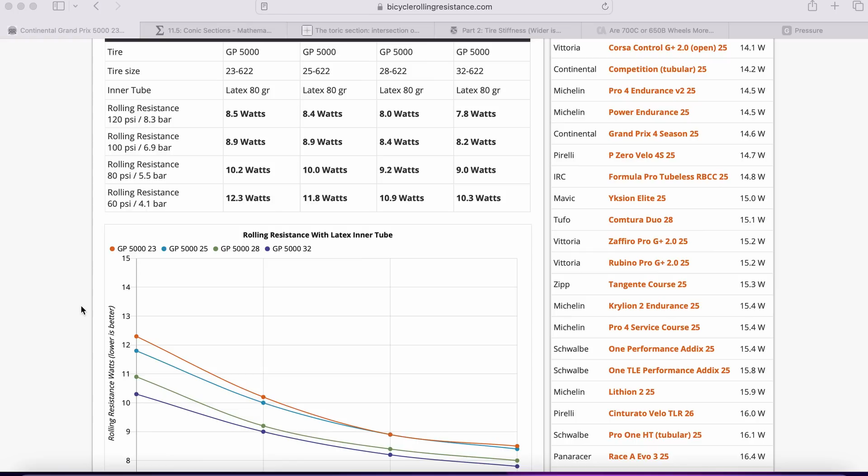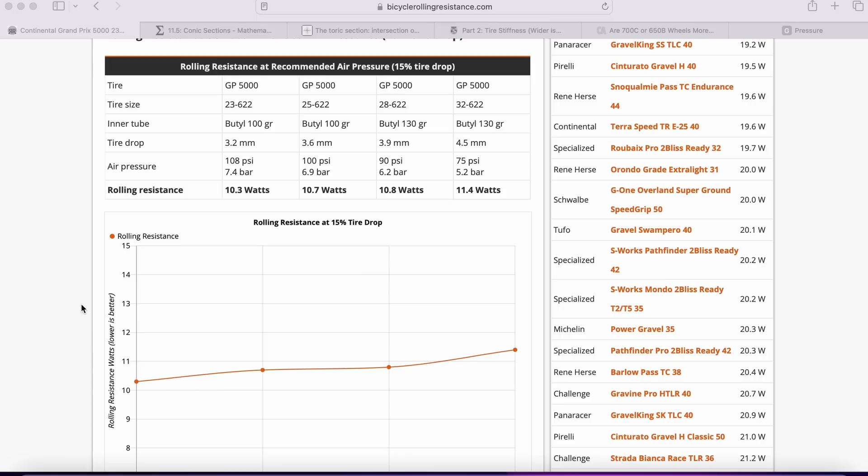And showed that wider tires, in fact, have lower rolling resistance on the rolling drum. The author of this test, however, pointed out that wider tires at the same air pressure as narrow tires would be less comfortable. This is because wider tires have more air volume, and more air volume makes the tire feel firmer. So the author then repeated the test by establishing a comfort level that all the tires would be equal. To do this, they lowered the pressure in the wider tire so that the vertical displacement would match that of the narrower tire. And when they repeated this test, lo and behold, the wider tire had higher rolling resistance than the narrow tire.

Another test was carried out by fellow cycling YouTuber Cycling About. He has a website where he publishes technical articles on things that he's interested in. One article he published looked at the difference between a wide gravel tire and a narrower gravel tire. The wide tire was 50 millimeters wide and the narrow tire was 40 millimeters wide. In that test, they rode these different tires on a bumpy gravel track, as they said, and compared the vertical compliance, or comfort, to each other by using an accelerometer.

Now, in order to set the tire pressure in the different tires, they used LaPlace's Law. We're going to talk about what LaPlace's Law is, and I'll give you a demonstration. But for now, just know that LaPlace's Law is this idea of setting equal casing tension based on the diameter of the tire. So they used LaPlace's Law to set the tire pressure in this study, and it turns out that the wider tire was in fact more comfortable.

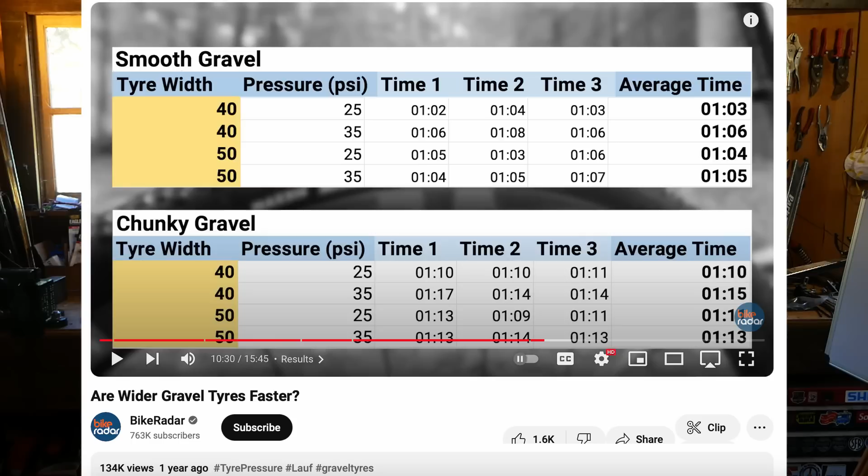Dylan Johnson, who many of you know, fellow YouTuber, currently 17th place in the Lifetime Grand Prix, left a public comment on a BikeRadar video titled 'Are Wider Gravel Tyres Faster?' He makes an argument that the conclusion of the test results in that video would have been clearer if the authors had compared the two tires at equal casing tension.

So this got me thinking: does equal casing tension equal comfort? If both tires, a wide versus a narrow, were set at a pressure so that the casing tensions are equal, does this actually equate to equal comfort? So I looked around on the internet to see if I could find any studies done on this with bicycle tires, and I couldn't come up with any. So I thought to myself, well, maybe what we should do is set up an experiment and test this for ourselves.

Today, what we're going to do is see if we can figure out whether wide tires at a lower pressure with equal casing tension to a narrow tire at high pressure will have equal comfort. So what is LaPlace's law?

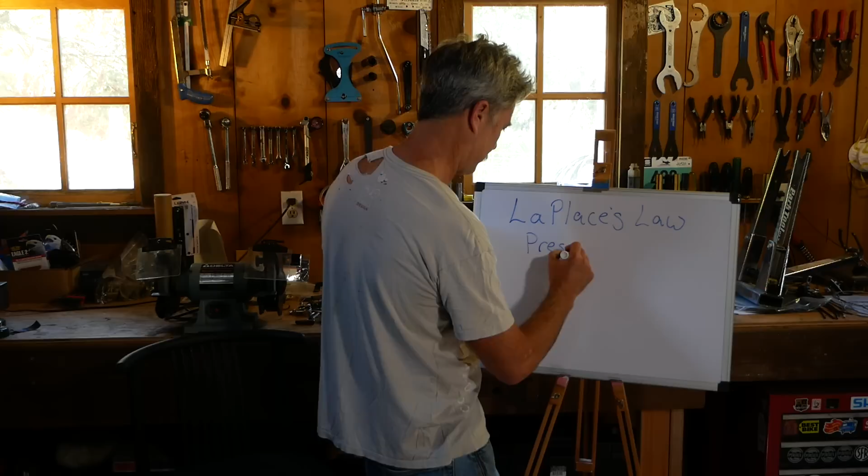I'll put up a little diagram on the screen so we can all see what he was saying. Laplace was a famous French mathematician and scientist. He came on the scene about 100 years after Newton, and he studied Newtonian physics and was really interested in it. He was more noted for his Laplace transform, but also for the Laplace law dealing with pressure vessels.

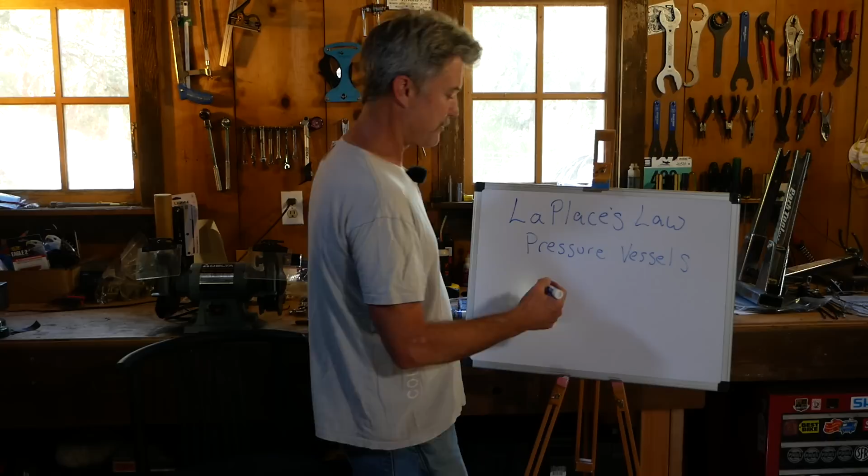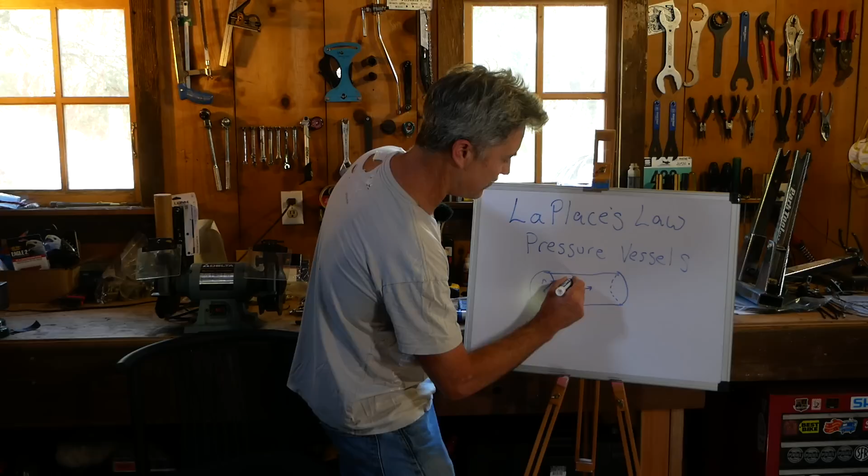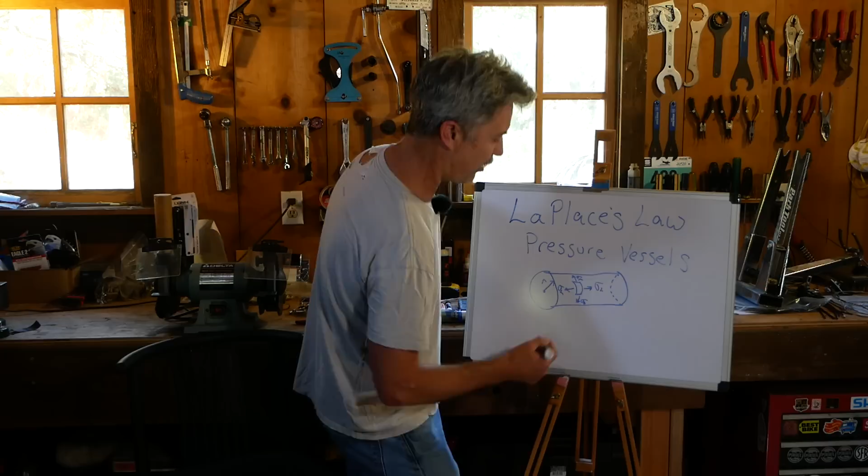To give you a simple explanation, what Laplace said was that the internal pressure of a pressure vessel - let's say it's a tank like this with a radius - if the pressure in the vessel is in equilibrium, the tension or stresses, the principal stresses in the vessel, that is the stresses in the longitudinal direction and then the stresses in the radial direction, we'll call that R.

The radial direction, or the hoop stress direction as it's sometimes called, would be proportional to the size of the pressure vessel. So naturally, a lot of people in the bike world assume this should also apply to our bicycle tires, because our bicycle tires are thin-walled pressure vessels.

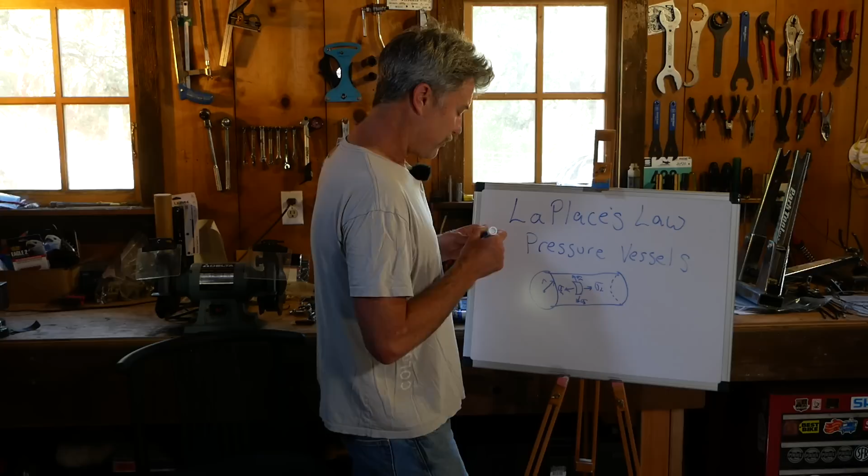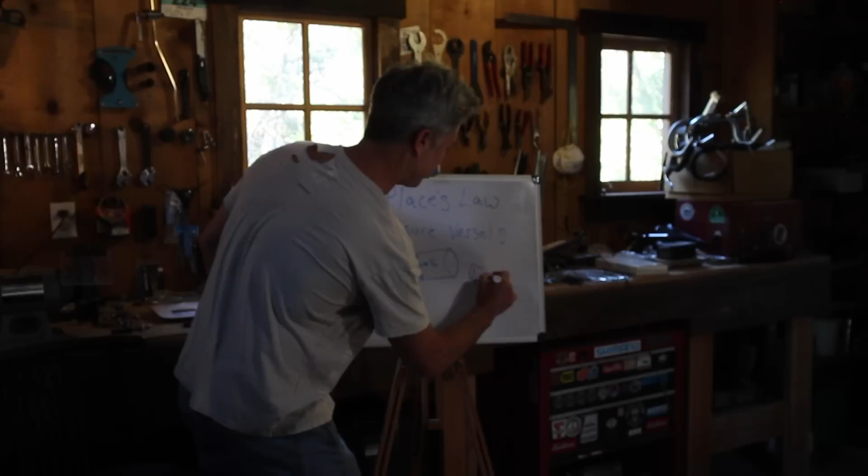So the formula that comes out of this, if you do the math and a free body diagram, is that the stress in the radial direction is proportional to the width times the pressure divided by 2. It's essentially a very simple relationship.

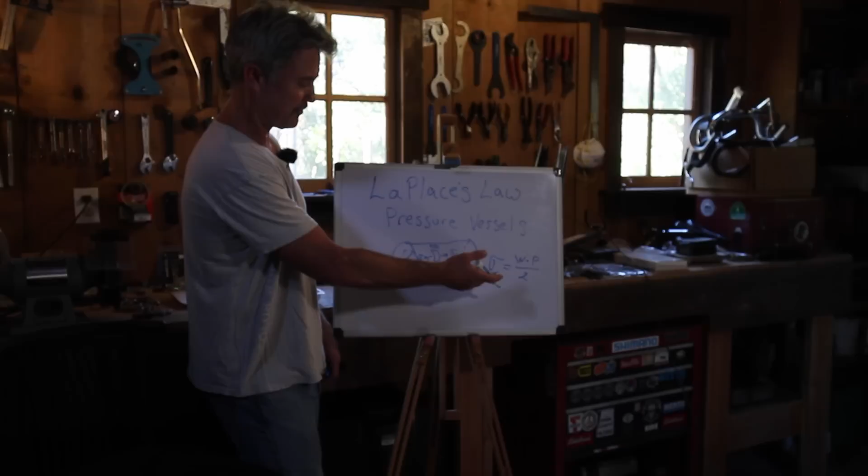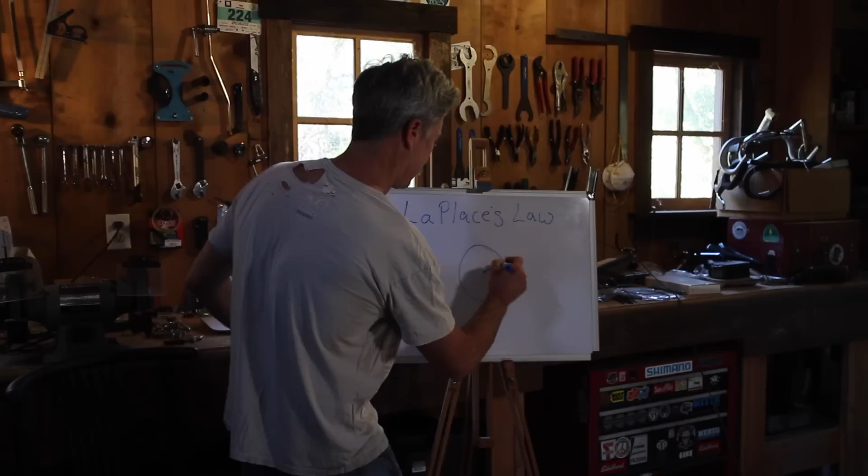If you take this idea and apply it to a bicycle tire, you would need to take 2 tires. Let's just show it - let's clear this out a little bit. So if we had 2 bicycle tires, here's a small tire and a large tire. We'll use a big R for the big tire, and a small r for the small one. And we have a width of our tire, so width 1...

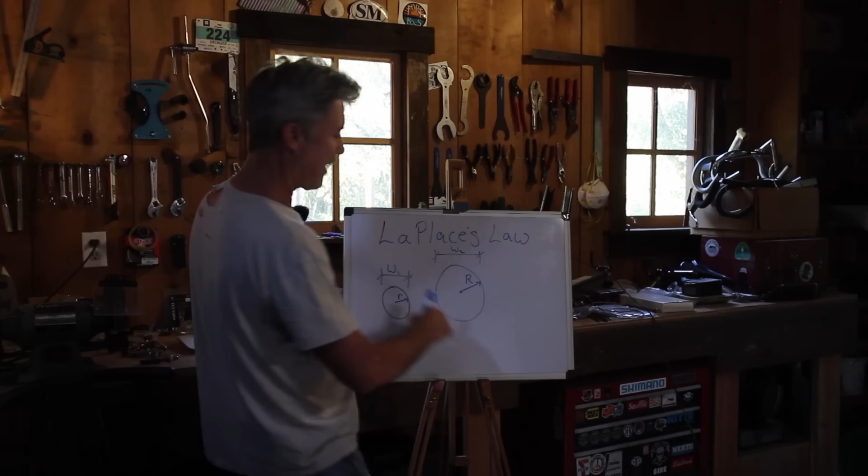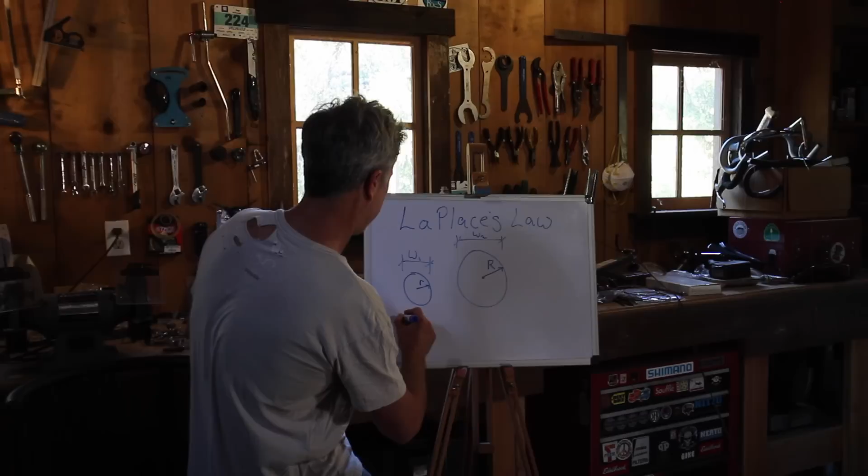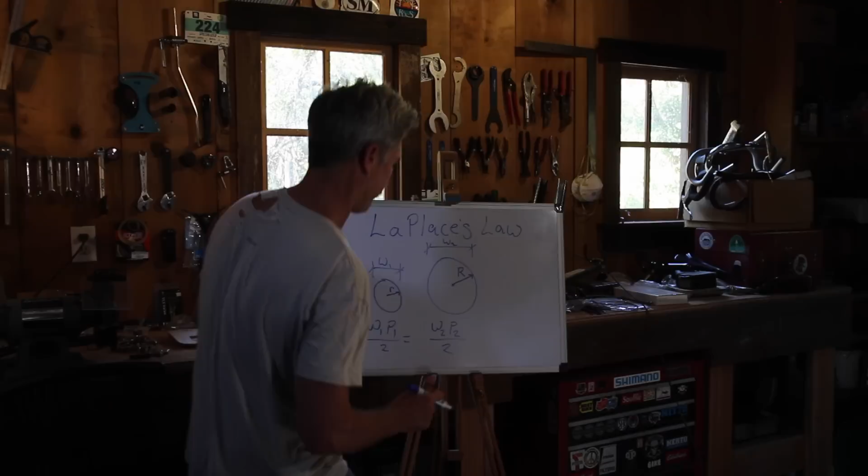...and a width 2. In order to have an equal tension in both of these tires, we would have to vary the pressure. According to LaPlace's law, we would set the stresses equal, and we end up with W1 P1 over 2 equals W2 P2 over 2. We can rearrange this equation very easily - the 2's cancel, and what we end up with is P1 equals P2 times W2 over W1.

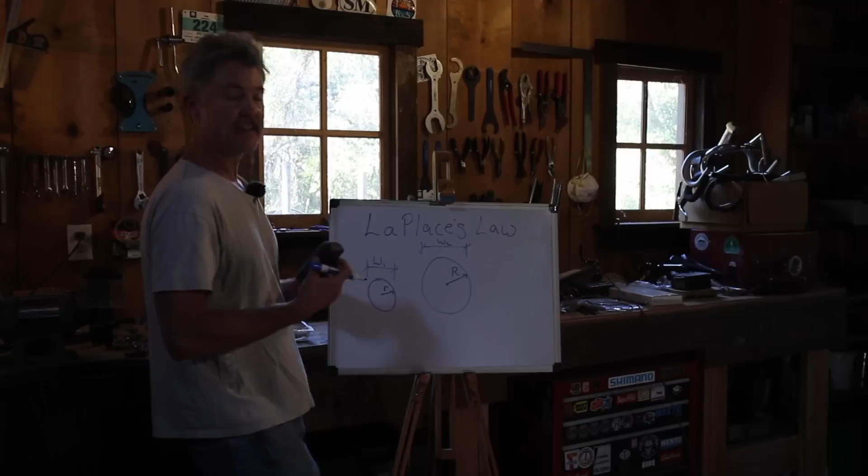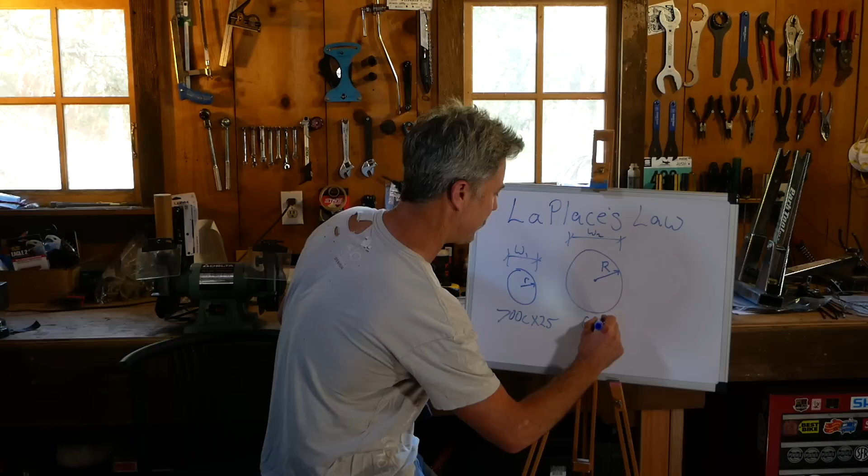So it's a very simple ratio here - we can solve for pressure 1 based on the pressure we put in. Let's do a quick example, and I'm going to pick a tire size. That's the tire size we'll be using in this test, which is a 700C by 25 and a 650B by 48. We're going to run through a series of different pressures and different loads - I'll show you the test setup in a minute.

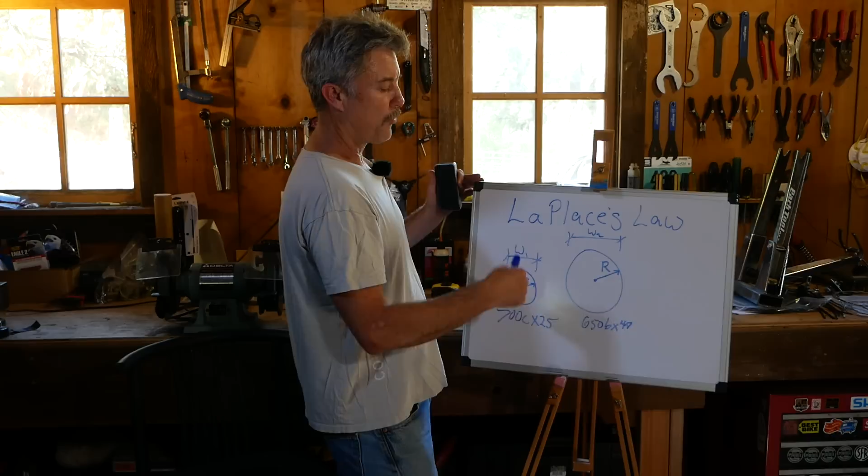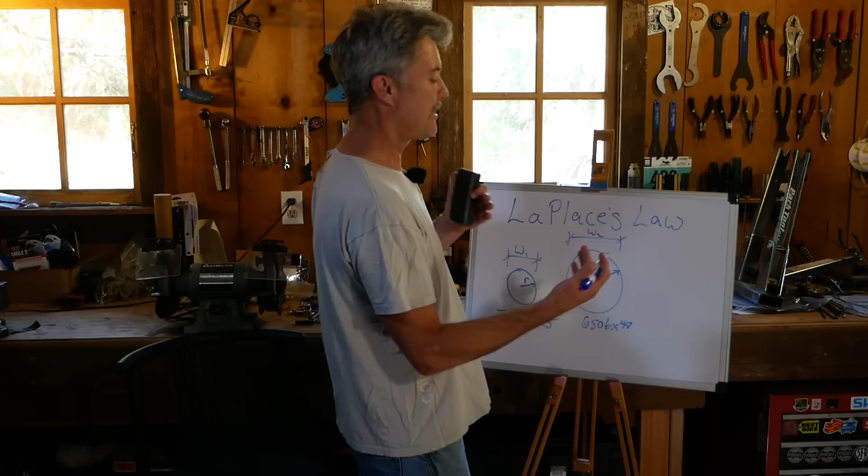We will see if Laplace determines the same load displacement in each of these tires. Will they match? Will the comfort be equal? The comfort in this case is the vertical displacement of the tire. The theory is that we'll set these to equal casing tension, and therefore the curves will be the same.

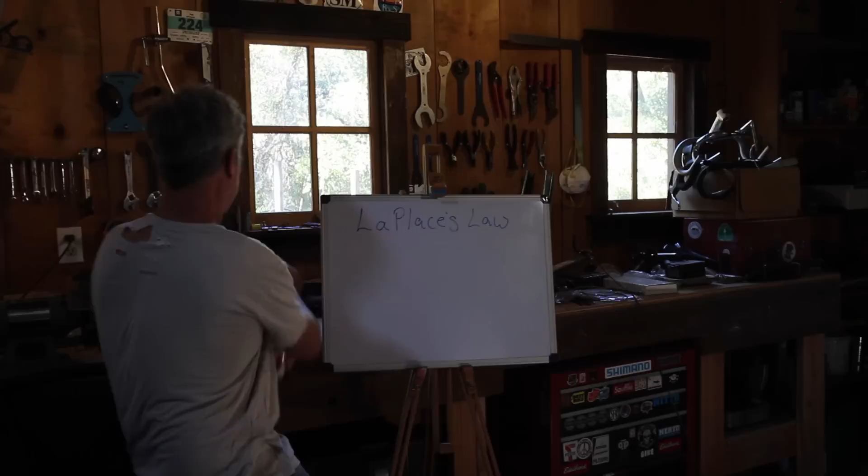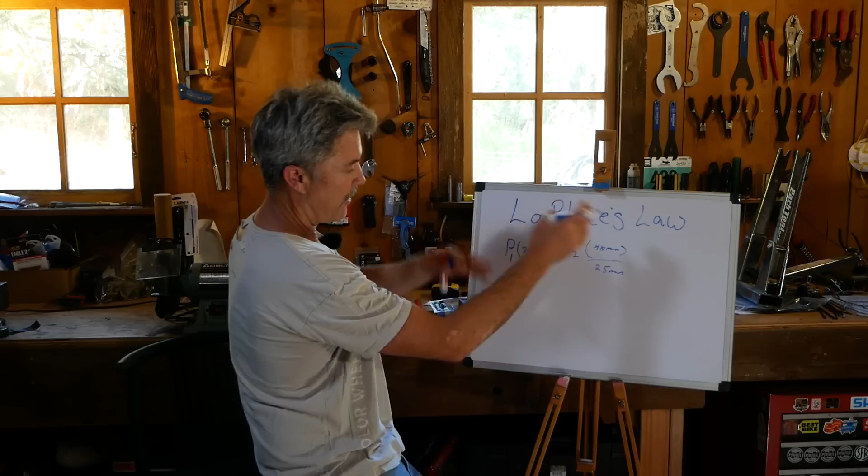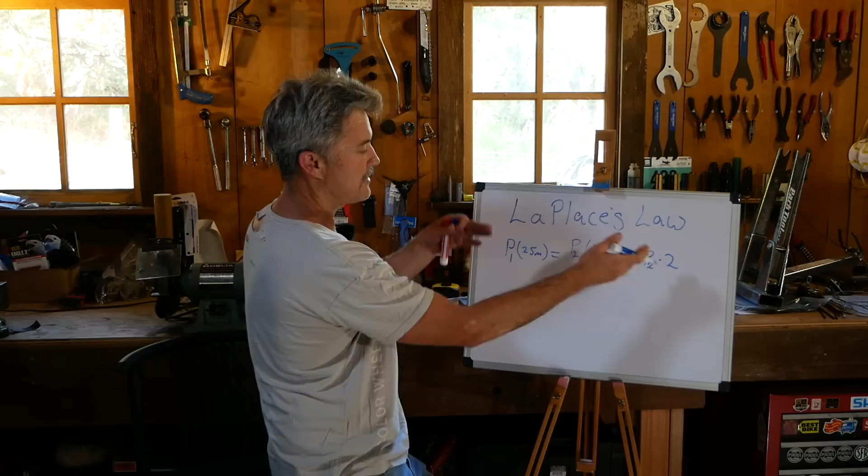So here's what Laplace would predict for these tires. If our width was 25 millimeters, the pressure in the 25 millimeter tire will need to equal pressure 2 times 48 millimeters divided by 25 millimeters - that's the pressure we'd set in 1 based on pressure 2. If we just assume for now, since I don't have a calculator, we go to 50 millimeters, then this is simply P2 times 2. So the pressure in 1, the smaller tire, needs to be twice the pressure in 2.

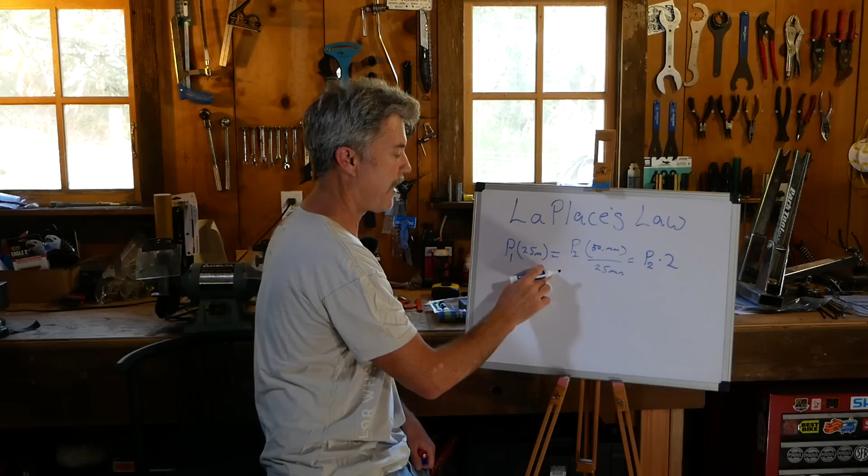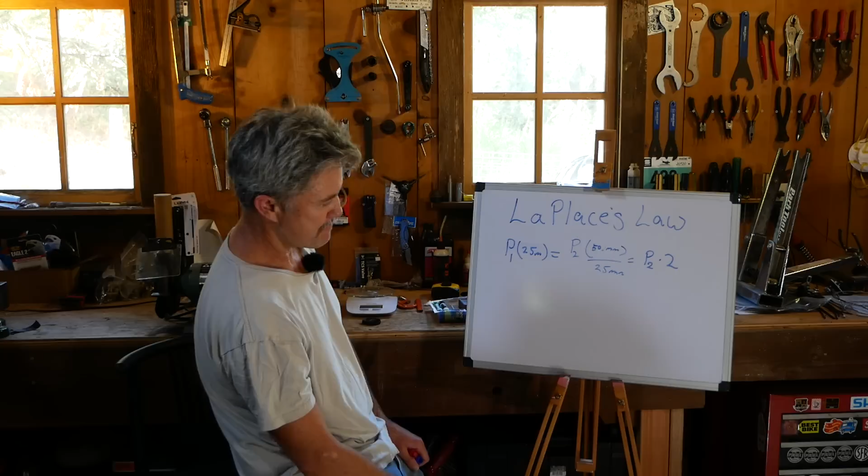I want you to keep note of that as we do this experiment and look at the data - that LaPlace's law says the tension in the sidewalls are equal when the pressure in 1 is equal to 2 times the pressure in 2. Okay, and that makes sense - the skinnier tire will be pumped up higher than the wider tire.

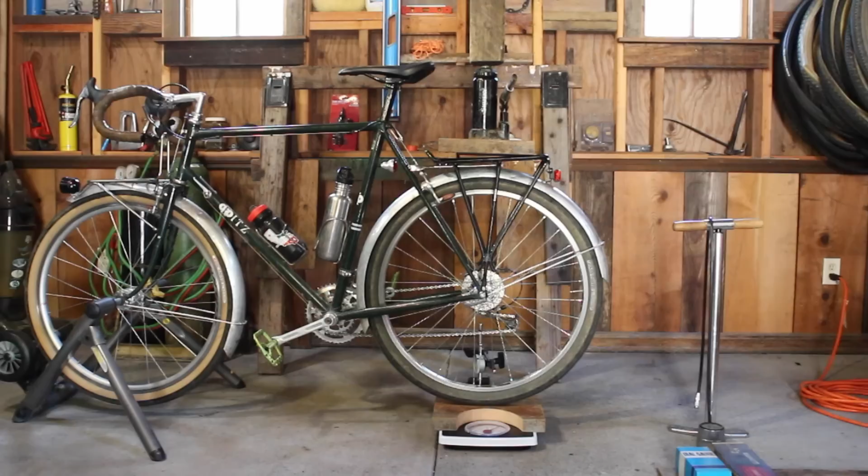So what I have is a very simple setup, something pretty much anyone can do at home if they're interested. I have my bicycle in a bicycle trainer stand with the front wheel mounted in the trainer, and the rear wheel is what is being set up in our test so that we can measure the displacement. I picked the rear wheel because it was easy to mount that rack on the back of the bike that I could then use as the way to put a hydraulic press on it and push the rear tire down into our load cell.

On top of our load cell, we have our dial indicator, which is what we're using to measure the displacement. I chose to mount it this way because I wanted to take out any possible error that might have occurred if we were measuring it where a lot of tests are done, measuring displacement at the axle relative to the ground. By setting it up that way, you introduce a lot of error in your displacement because when you load a bicycle wheel, the spokes that are in tension relax a bit, so some of the displacement is the spokes themselves plus the distortion of the rim as you have unbalanced tension now in your spokes.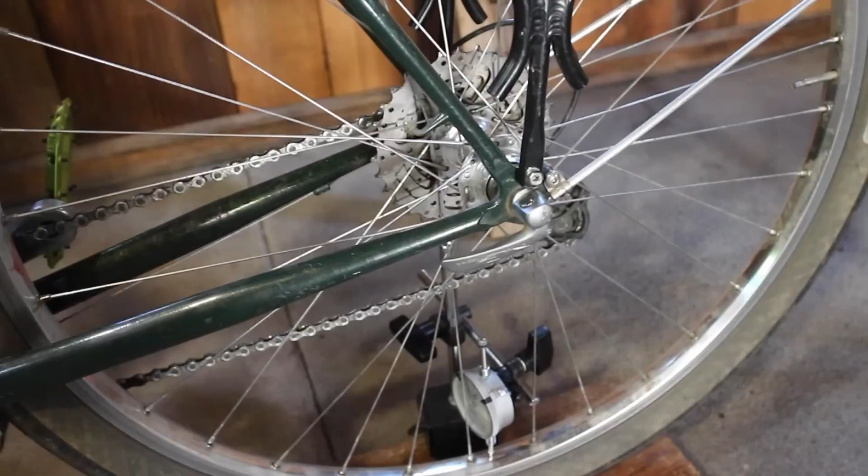The rim itself will also deflect slightly, and the load cell can also deflect a little bit as well. So by putting the measurement from your axle to a point on the ground somewhere, measuring that way will introduce error. I think this method reduces the amount of displacement error as much as possible.

We have our dial indicator set up directly over our contact patch, and we have the contact patch sitting on this 2x10 wood block with a circle cut out of it so that we can read our load cell. That's there because this platform on the bathroom scale is made out of very thin metal. While it worked great with my magnetic base, the problem was the tire puts a concentrated load in the middle of our bathroom scale, and it actually causes the bathroom scale surface to bend, which threw off the measurements a little bit. By putting this 2x10 on here, we're able to distribute the stresses more evenly on the load cell and take out that distortion that was happening.

So the forces for our load test are being generated by this bottle jack. This is a 4-ton bottle jack, and it is pushing up on this 4x4 post, which is mounted to the ceiling. I mounted it with these metal angle clips that keep the post hanging from the ceiling rather than sitting on, weighing down the jack and the bicycle and adding weight to our test.

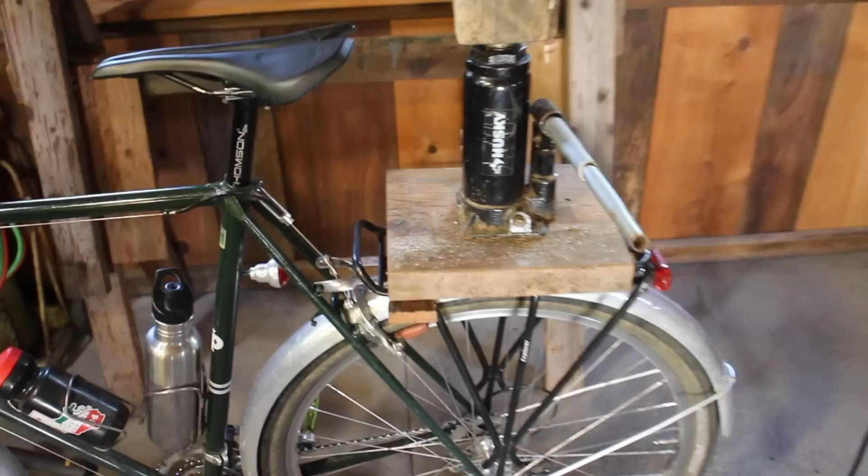So the post is not actually included in the weight that you see here. There's 36 pounds right now, and that's the bicycle, the bottle jack, the 2x10 on the scale, the dial indicator and magnetic base, and this other 2x10 up here, which is just to help level out the bottle jack so that all of the load is collinear with the rear axle and contact patch. I wanted the load to be as straight as possible to reduce any eccentricities or any anomalies that might have occurred, any out of plane loading that might have occurred when we test it.

The front of the bike is supported by this bicycle trainer stand, and everything is very solid here. Nothing is moving around when we're loading it.

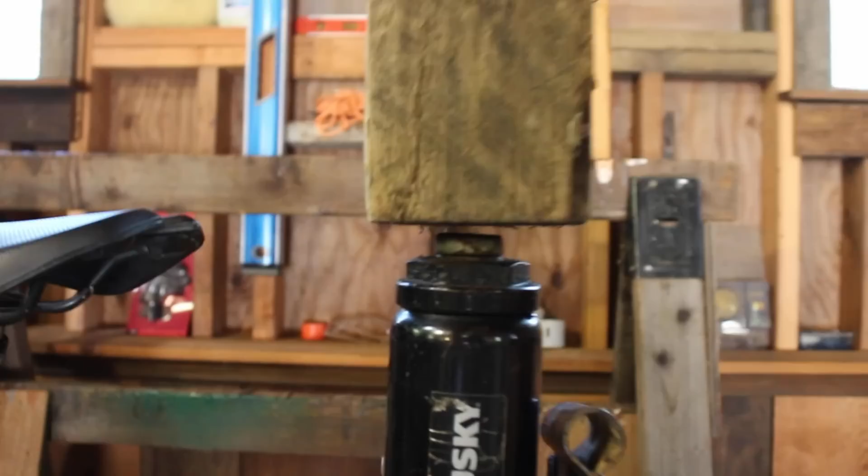As you can see, if I go ahead and run through a little example here. This is just to lock in the jack. You can see there's no contact right now between the 4x4 and the bottle jack, so it's free to move around. So let me go ahead and get this thing started here for a second. We'll go ahead and push that, and as you can see down here, as I pump this, we can carefully apply load to the tire.

And while that is going, you can see that the dial on the dial indicator is also moving as we apply the load. Now this dial indicator here is a 1-inch dial indicator that I've had for a really long time actually. I bought this when I was in high school at Harbor Freight. So this is a 1-inch dial indicator with a graduation, and each one of those points on there is 1/1000th of an inch.

And over here, we're accurate to about a pound.

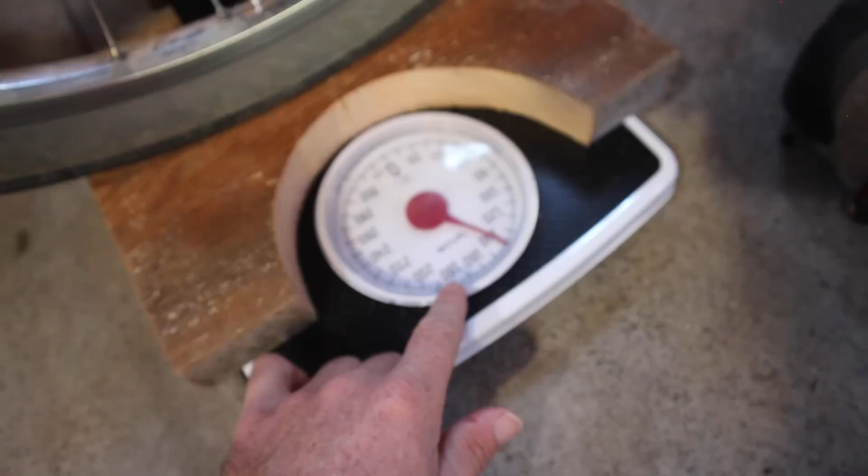Each one of these points on here, each one of these graduations is 1 pound, and we go all the way up to 320 or 330 pounds. But for our test, we're gonna stop at 300 on our scale.

I'll be running 2 different size tires using 650B wheels. So we're gonna be using this wheel here when we do our 700C because it's got a very similar style of rim, not exactly the same width, but fairly close. And I will measure rim width as well as tire width, and I'll report all of that in this experiment.

So this is the dial calipers that I'll be using. These are very accurate down to also 1/1000th of an inch.

For air pressure, I will be using this floor pump. I actually have 2 floor pumps. I checked the 2 floor pump gauges to each other and they were off by about 8 pounds per square inch, so they're very different. But anyway, we're gonna use this pump for all of our tests and all of our pressures.

I do not have one of those special digital tire pressure gauges. I have an old school one that's the sliding gauge, but it has a Schrader valve type valve on it and it won't work with the Presta. I do have a Presta valve adapter, but for the sake of simplicity, this is the gauge I'm using for my tire pressure. Like all tire pressure gauges, they are not very accurate, but this is consistent as long as we use the same tire pump with tire gauge for all the tests. At least the test data is consistent.

Okay, so let's take a look at the data that we collected from this experiment and see if we can figure out what's going on here.

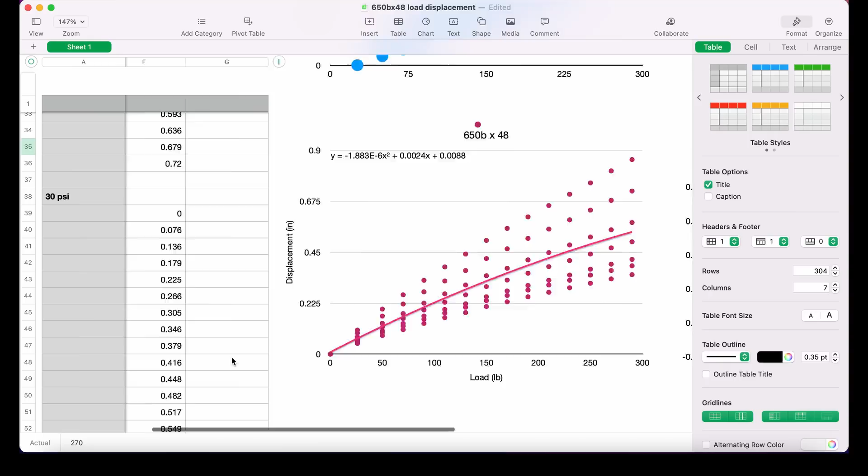So these are the graphs from this data. All this data for all these tests were plotted together on the same charts, the same graphs. And I did that so that we could see how each data set compared to the previous data set.

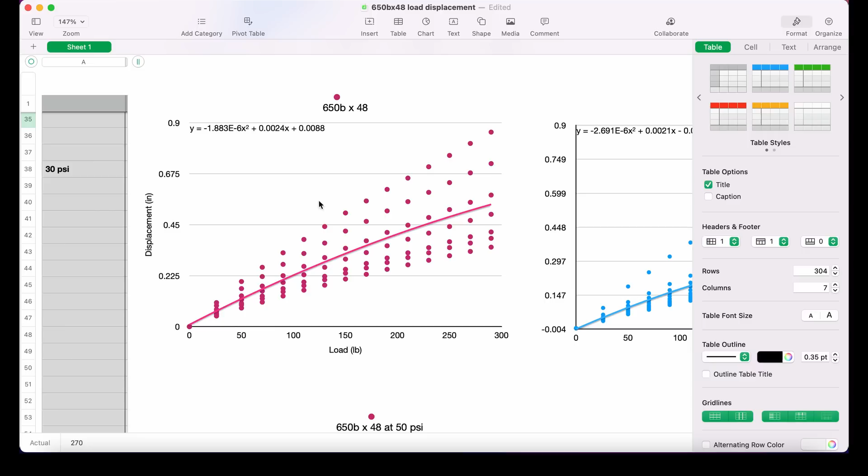So this particular chart is the 650B by 48, and this one next to it is the 700 by 25. These are all the data points for both tests, for both tires. Now you'll see this data set here stops at about 220 pounds, and that's because the 25 millimeter tire bottomed out at 220 pounds at the 20 psi.

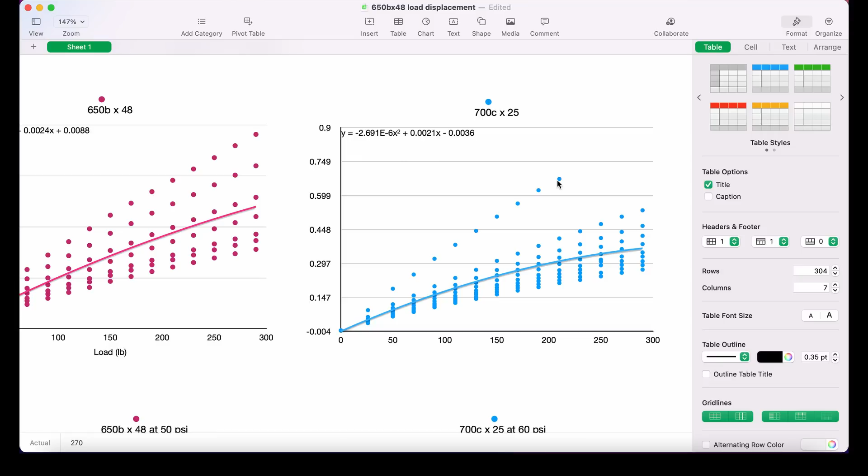So we stopped the test early. Over here for the 650B, we started at 10 psi and we were able to complete the test up to 300 pounds, but you can see it's quite a lot of displacement.

Now these lines that are on here, these are an approximate curve fit for the data set, and it's utilizing a polynomial second order equation to predict or to show the trend of the data. So what's nice about this data set is that I have them colored: red is 650B by 48 and blue is 700 by 25.

And what we can do is we can overlay these charts and take a look at the differences in the data and how the two tires will, in a sense, compare to each other. We can clearly see that the 25 millimeter tire has a lot less deflection.

Deflection is plotted on the y-axis and load on the x-axis for both data sets. Both axes are scaled to match each other, so when we overlay them like this, we can see how the two tires compare. I want you to notice a couple of things from this data.

First, as the load increases, the displacement is increasing at a decreasing rate, so it's a non-linear curve. This is one data set here: 10 psi, 20 psi, 30 psi, 40, 50, 60, and 70.

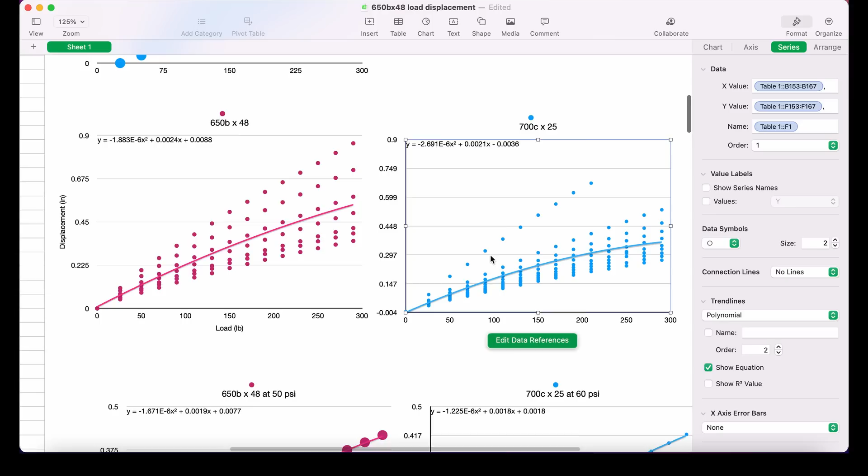Now we want to see if LaPlace would predict a similar load displacement for these tires. So I dug through the data, overlaid these data points, zoomed in, and tried to find the best-fitting data where the two curves matched each other as closely as possible. I could see that this data set, blue and red, overlay really well.

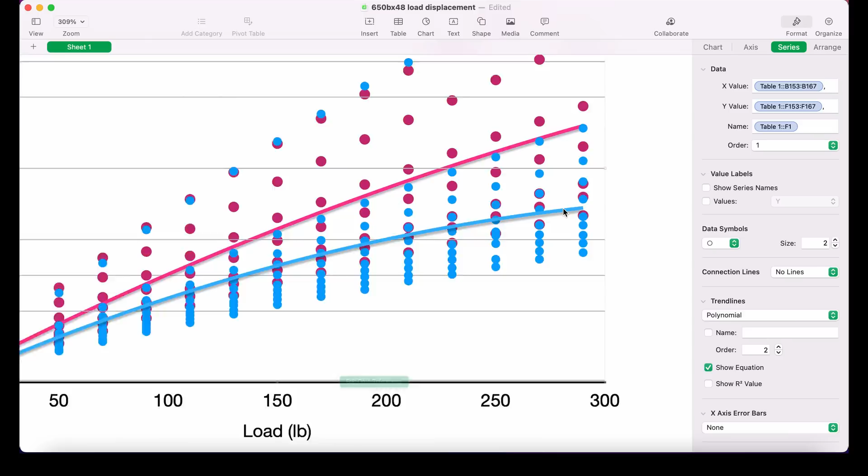This one's pretty close, that one's pretty close also. So down in these areas we're starting to see some similarities. I pulled out a couple of data points where the two charts were overlaying very similarly - the two tires at these pressures.

So here's two data points, and you can see that these two curves match each other pretty well. I have the charts scaled vertically to be similar or matching, and we can see that blue and red are following nearly the same trend.

So what is this air pressure? This is the 25 millimeter tire at 60 psi, and this is the 48 millimeter tire at 50 psi. Now, if we were to use the LaPlace pressures - 60 psi and 30 psi, which is what LaPlace would predict using the LaPlace relationship - you can see the two curves are not the same.

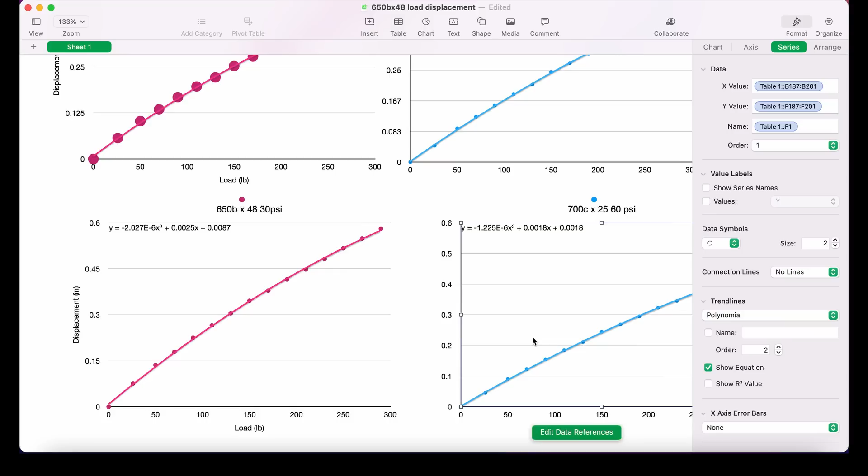The 25 has much less deflection at every load, so it's not going to deflect as much. Essentially, using LaPlace's law, or setting the casing tension equal, will penalize the narrow tire while giving some slack to the wider tire.

Now I chose 30 psi because that's a more realistic number for a 650B/48 tire. Most people are not going to run 50 psi - that's just way too high for a 48 millimeter tire. It's going to feel very harsh on the road.

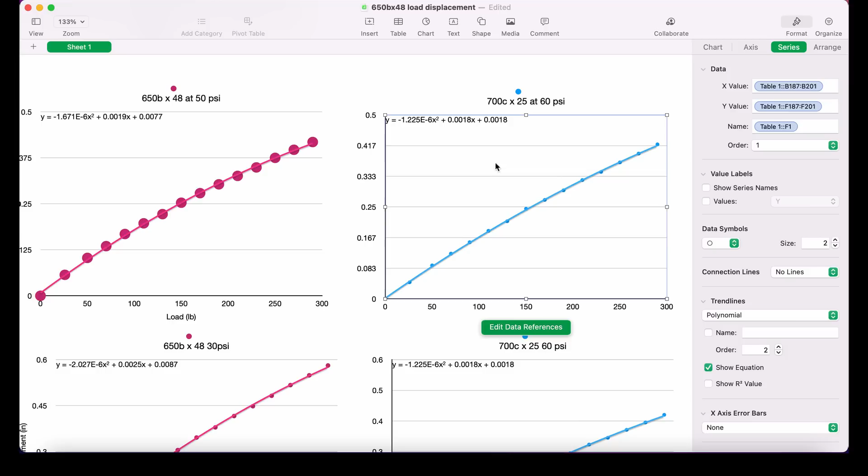But if you were to try to find a pressure where the two tires feel the same, you'd have to set the 48 to 50 psi and the 25 to 60 psi. Again, you wouldn't run your 25s at 60 unless you've noticed this relationship, like I have. I do try to run my 25s and 28s down to 60 psi because I know it feels a lot better - it's actually a lot closer to how a wider tire feels.

So I wanted to show that so we can see how the LaPlace equations are not going to predict the load displacement correctly, and that's why we shouldn't be using them.

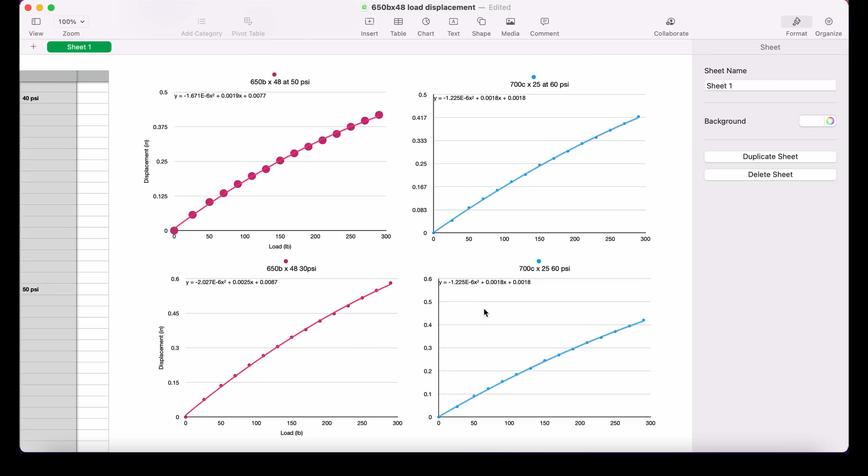Okay, so next we need to figure out why this is the case.

I don't know why you guys can't just shut up and ride.

Now that we've had a chance to analyze the test data, why didn't LaPlace's law predict the comfort of the bicycle tires? To answer that question, I think we first need to take a look at the geometry of a bicycle tire and why it may not behave the way LaPlace's law would predict.

A bicycle tire is formed from a geometric shape called a toroid. A toroid is formed by taking a small circle and sweeping it around a large circle. That is how a toroid is shaped. It's not drawn very well here, but you get the idea. It essentially has two different radiuses, the small radius and the large radius that create it. So it's a donut. And toroids have very interesting geometric properties.

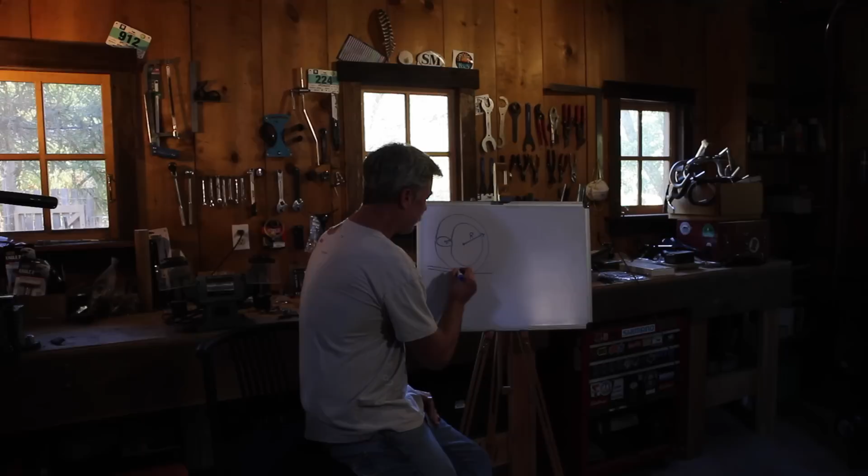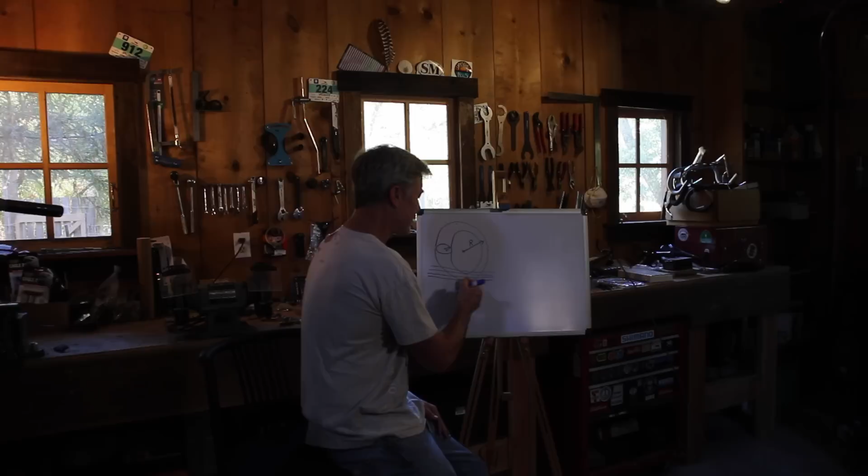One of the things that's really interesting about a toroid is the different cross-sectional shapes you get when you slice it up. Looking at it from the perspective of a bicycle tire, if this is the ground surface here, and we want to look at how it might behave when it's pushed on, we can take cross-sectional cuts through the tire and look at each one of these cross sections to see what the shape looks like. If we take a cross-sectional cut at an equal distance, starting at the bottom here at the ground before there's any load on it, that's the very first point of contact with the ground. That cross-sectional cut would look like, in theory, just a point in space, no area, just a dot.

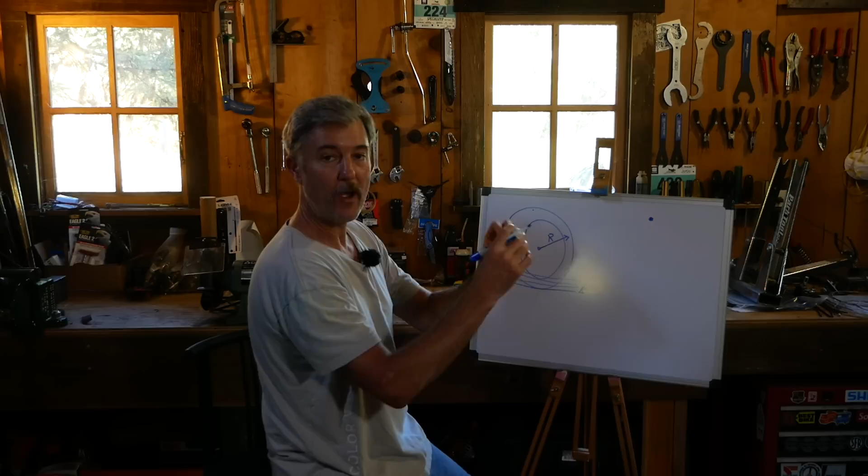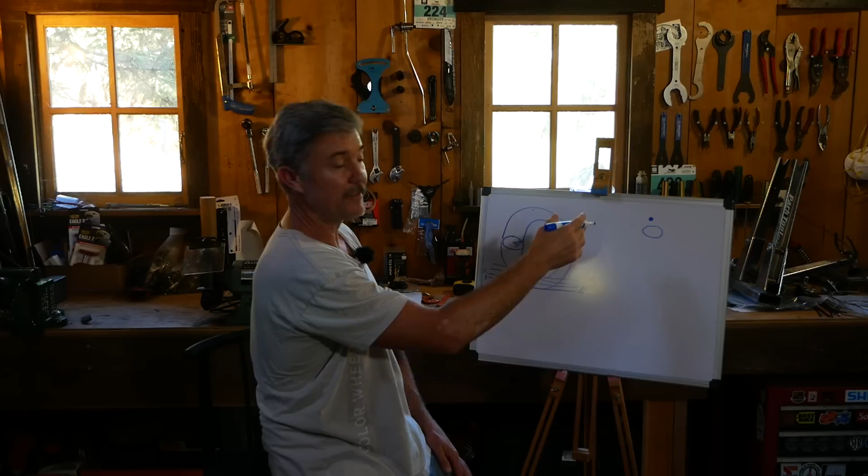If we go up some distance here, this is number 1. If we go up to number 2 and cut through there, that cross-section is going to begin to look like a circular shape that is basically elliptical. Then if we go up another one, let's say 3 — this is 1, this is 2 — if we go up another equal distance, we take a look at that cross-section, and again it's going to look like an elliptical shape. This is cross-sectional area number 3.

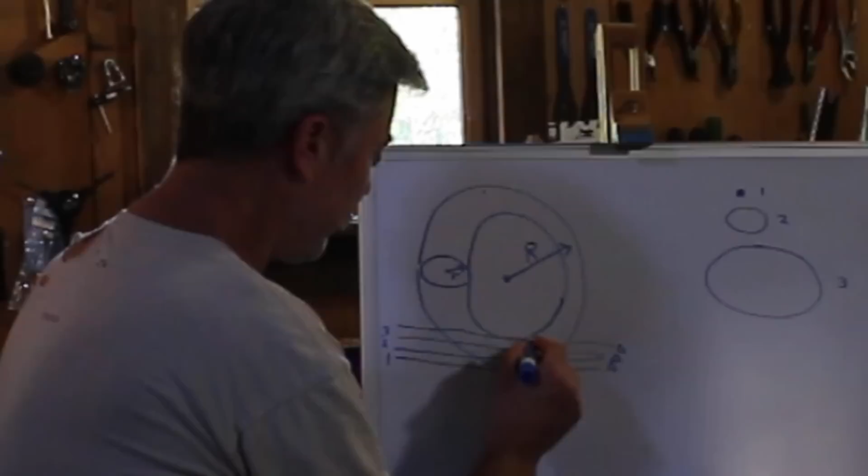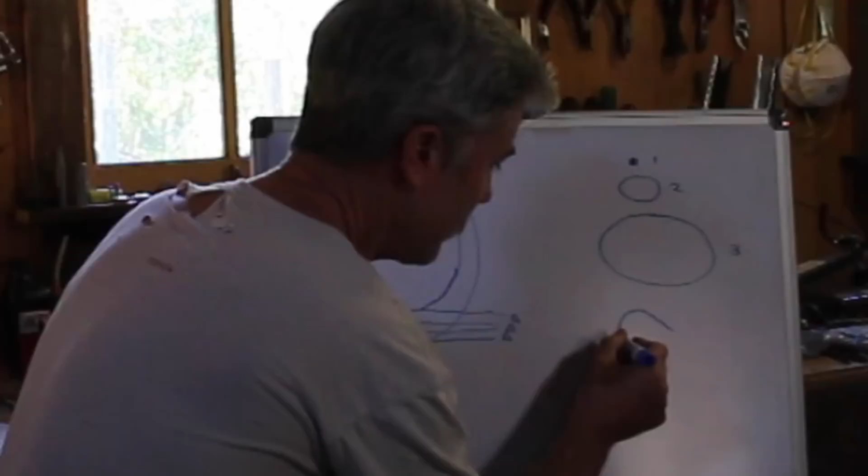If we go up another equal distance and cross — let's say we picked our lines, our distances, perfectly such that number 4 crosses right at the top of where it starts to curve down to the other side, right before we go into the void space — that cross-section is really interesting because it looks like an infinity symbol.

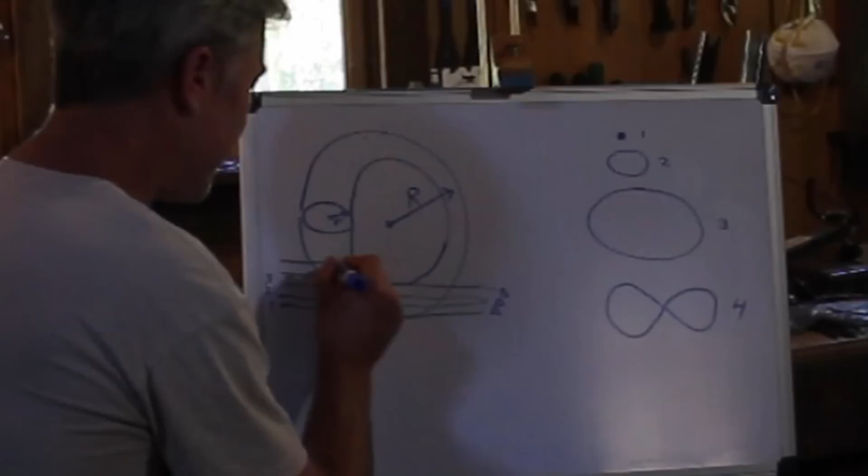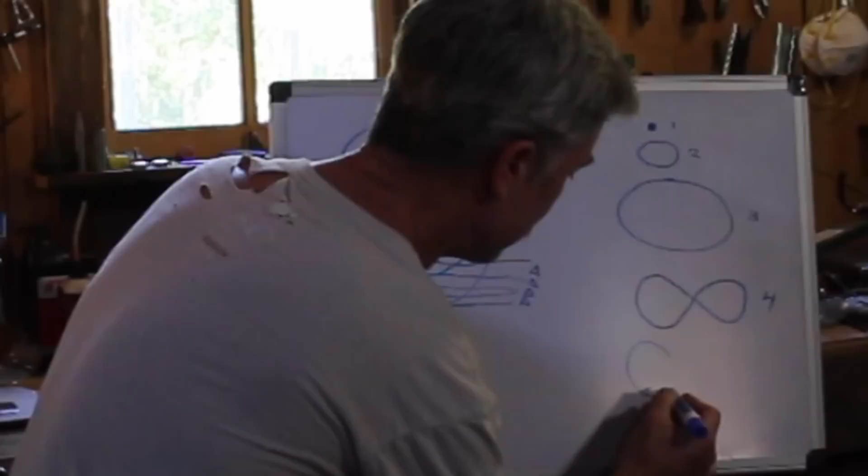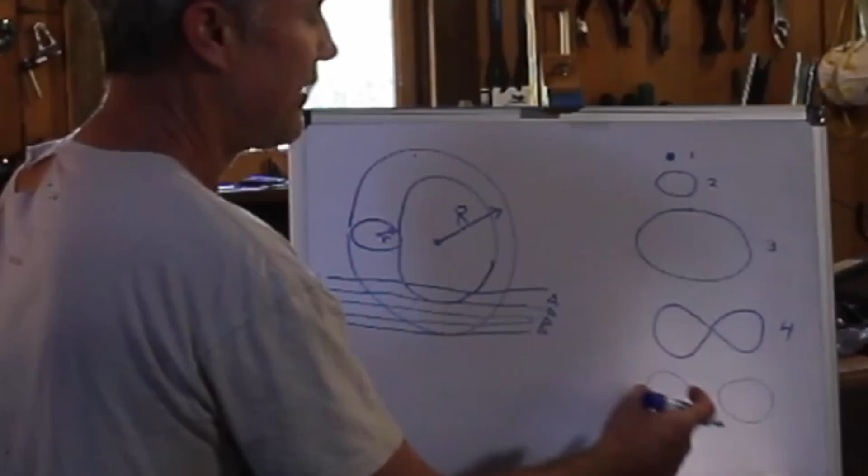And if we cut another section just above that, again equal distance, that cross-section is going to look something like this, where these look sort of like elliptical shapes, but more like an egg, where the radius on this side is larger than the radius on the inside. And there's going to be two. This is section 5. 1, 2, 3, 4, 5 — that's cross-section 5. Then if we just kept going, we'd keep seeing these get further and further apart as we reach the midpoint here, and those would basically just be two perfectly round circles.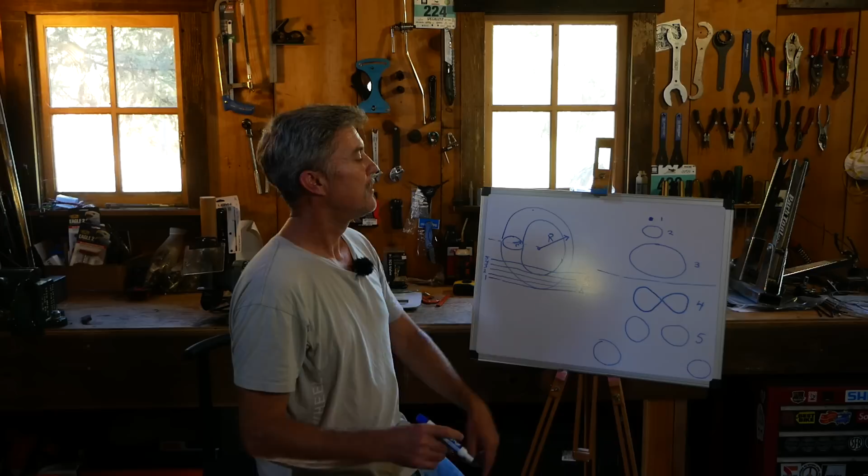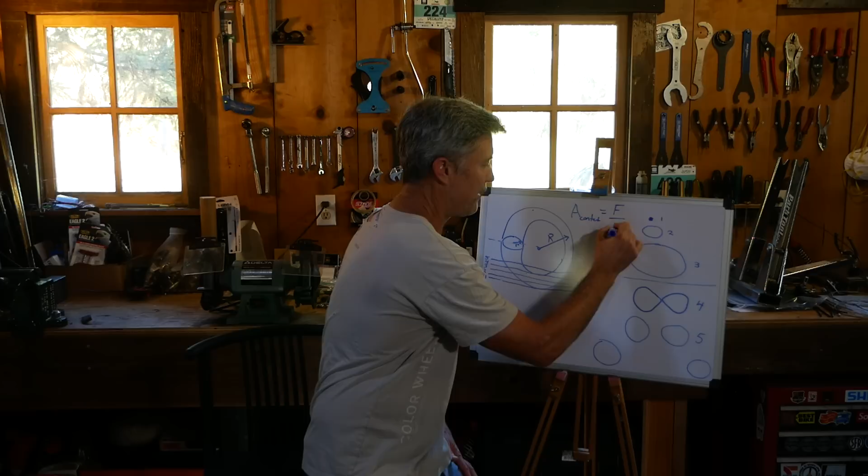Now, a bicycle tire isn't going to be pushed into the ground all the way down to where we hit the top of the rim with the ground. So our load displacement of the tire is basically going to end here — we're not going to go past this point. But this is really interesting because it helps us see what the contact patches of the tire might look like. If we remember back to some videos I made a long time ago, we talked about this and said that the area of the contact is equal to the force divided by the pressure. The force is the force acting through the hub, pushing down on the tire, and the pressure is the pressure in the tire. Therefore, the contact patch area, that's the cross-sectional area, is proportional to those two values.

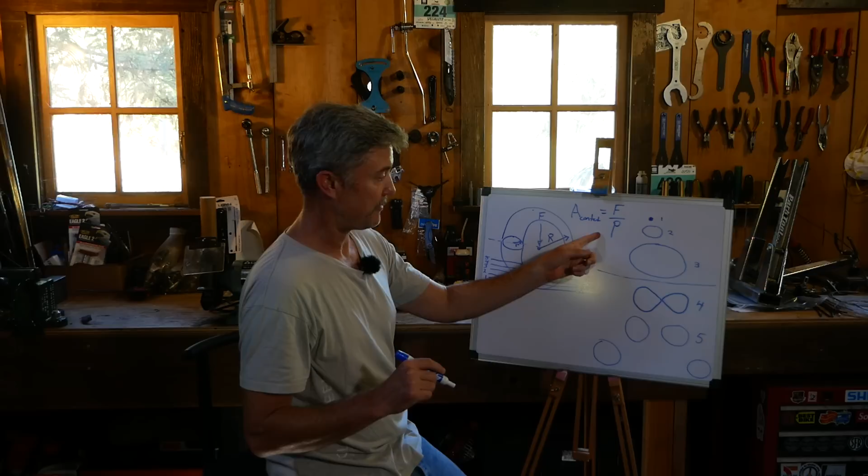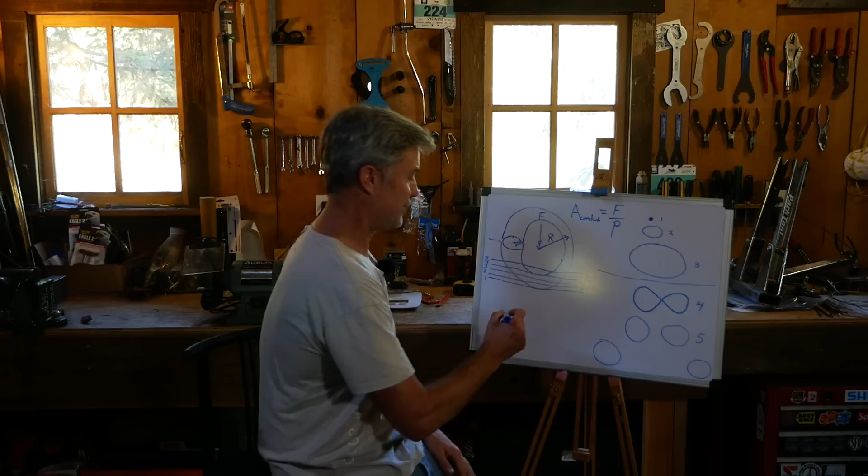We can see that this is a linear relationship, in that as the force increases and the pressure stays the same, the area goes up linearly. It's a linear relationship. If we look at that, area is going up linearly with the force, and we have a slope of a line there — we have a constant slope.

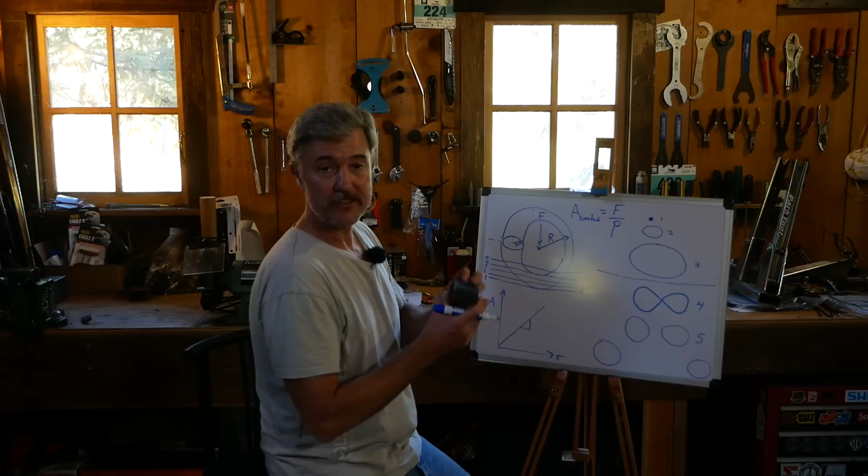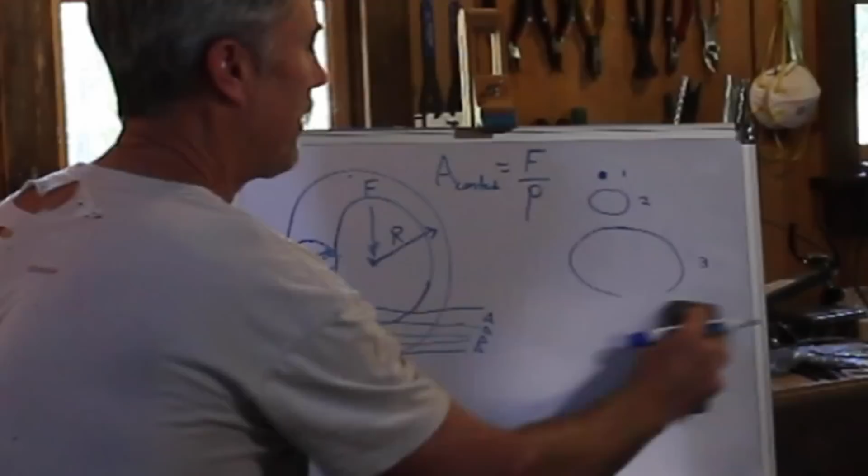However, if this wheel with this tire being a toroid goes down, it's pushed into the ground, we can clearly see that these areas appear, at least the way I've drawn them, to be increasing non-linearly. And they are. How do I know that? Well, like any engineer who doesn't have time to revisit parametric equations of toroids...

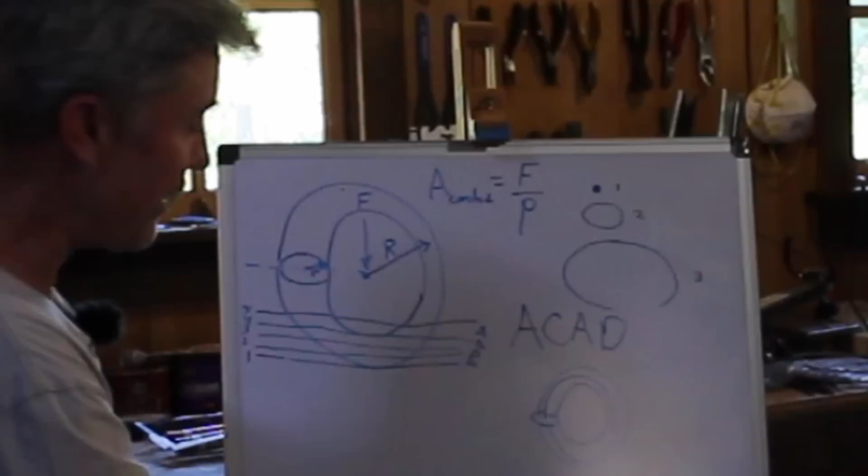We go to AutoCAD and create this toroid using a small radius and sweeping it around to create this three-dimensional object. We can define that radius to create the three-dimensional toroid, then slice through it at equal distances and study those cross-sectional areas. Sure enough, we get a non-linearly increasing area, increasing at some sort of power law. Maybe my test data was wrong.

So how do I know? I decided to look around online to see if I could find any research on load displacement of bicycle tires. I came across a recent article published in 2022. We're going to take a look at that article and see what they said about how they tested and created their theoretical model for the bicycle tire. Let's take a look.

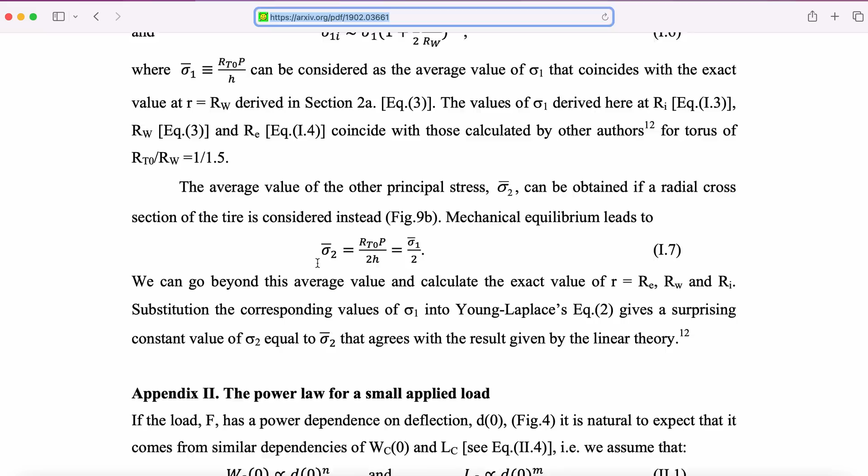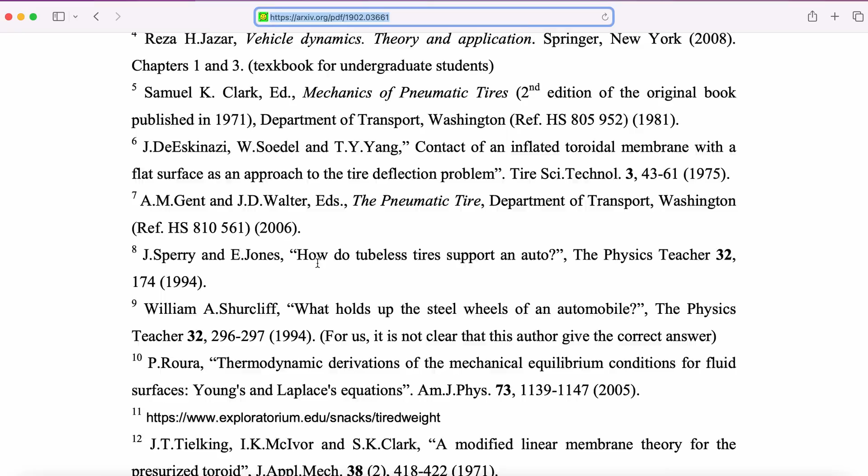This was published by a university out of Girona, Spain. The authors did a load displacement test for two different tires, a mountain bike tire and a road bike tire. They wrote up a very complicated parametric equation for how to calculate a theoretical displacement of a toroidal shaped bicycle tire with a truncated shape - I'll show you the diagram they came up with. They truncated a bicycle tire on the wheel, on the rim, and came up with these equations to try and theoretically determine the load displacement.

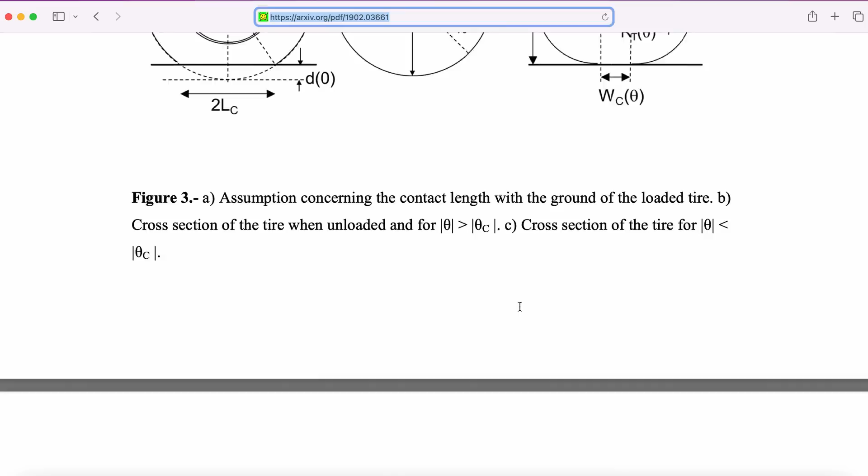So here it is, here's their theoretical model. You can look at this if you want - I'll put a link in the description. Then they tested it on a real tire using a load cell, like I did. And this is their chart. As you can see, it looks very similar to the one I came up with.

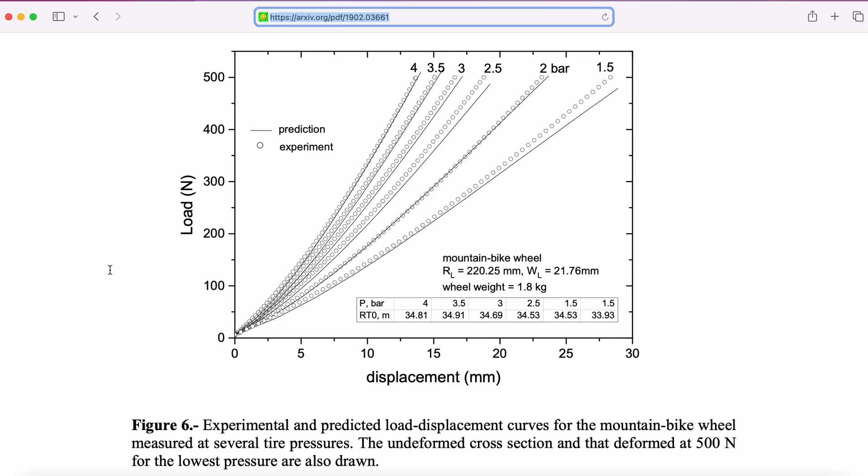I found that really interesting and was happy to see the similarity - my test data was pretty consistent with their test data. Same curve shape, more or less. You can see it's nonlinear at a uniform pressure - if you vary the load, it's nonlinear. And as you increase the pressure linearly, the difference in deflection is also nonlinear. So it's like a fan, this kind of fanning effect going on, and this is with the flat plate test as well, just like I did.

Now that you've seen that test backing up what I've done, we have pretty good agreement between my test data and theirs, and this idea of the toroid makes sense with both my study and their study. So it seems like we can say the bicycle tire's vertical displacement is largely dependent on the shape and diameter, more so than it depends on the casing tension.

As you saw, the author of that article talks about how his model assumed an inextensible membrane, meaning the tire does not stretch under load, even though in reality it does stretch a little bit. It's a very small amount, and we saw in my test data that the increase in width only increased a very small amount as we increased the pressure. That kind of confirms the tire itself is a very inextensible membrane - not perfectly, but pretty close. So that doesn't affect the way the tire displaces as much as the shape of the toroid does.

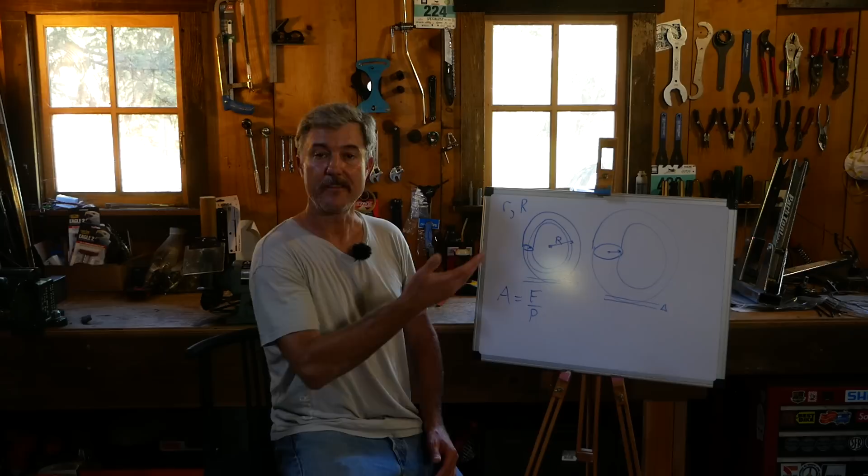So it appears, at least for now, that the toroidal shape is more of a determining factor for how a bicycle tire will displace than the actual construction of the tire and the stiffness of the tire casing and all that.

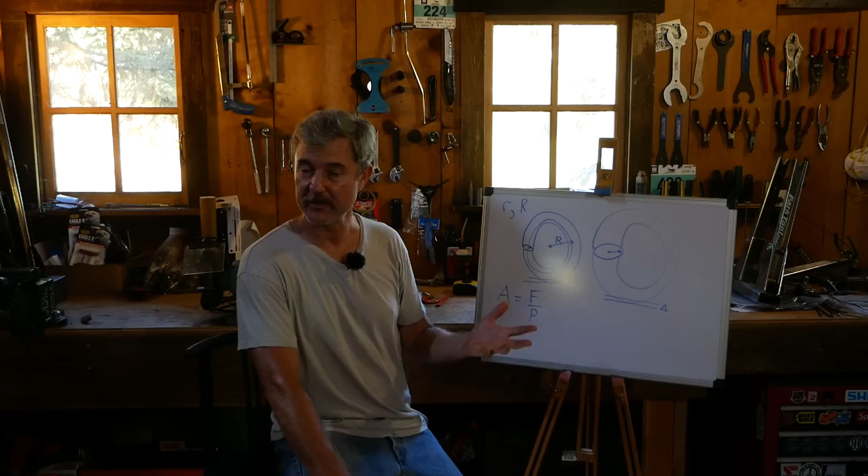So anyway, I thought all of this was a really interesting study. I think there's still more that can be done on this subject. We definitely need to take a look at how the vibration portion of this comes into play with our understanding of bicycle comfort and rolling resistance, but I have yet to see that either. So I'm looking forward to watching this subject continue to evolve.